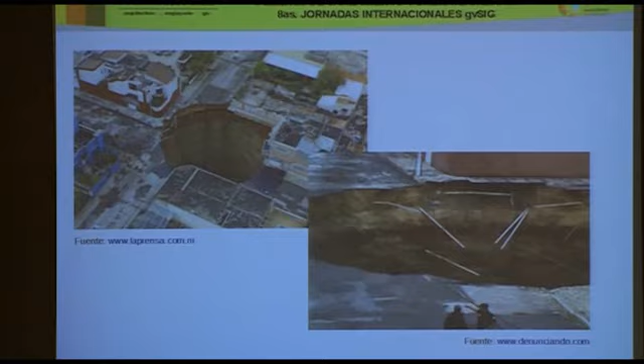Do we need to manage the urban sewage system? Obviously, the answer can be found in these two pictures. If we are not managing what's underneath, what's underground... those pictures represent a tropical rain in Guatemala, and this big hole has been created because of a lack of management of the network, and also because of another characteristic, a karstic land that was not well managed. This is why we need information, we need documents, we need to update that information for this sewage system network.

So the first part will be dedicated to the introduction. First, we are going to see what are the objectives and what is the methodology that we are going to use. Then we are going to see a theoretical data model that we could use to design our network. And we will also establish some information import tools, and we will also talk about gvSIG functions to complete the model.

Then with the tools that we find in the gvSIG environment, with extensions or with some applications, we will see a bit of the extension of those applications to manage this urban sewage system. And at the end of the first part, we will introduce the second part for those that will stay with us this afternoon, or for those that are not coming.

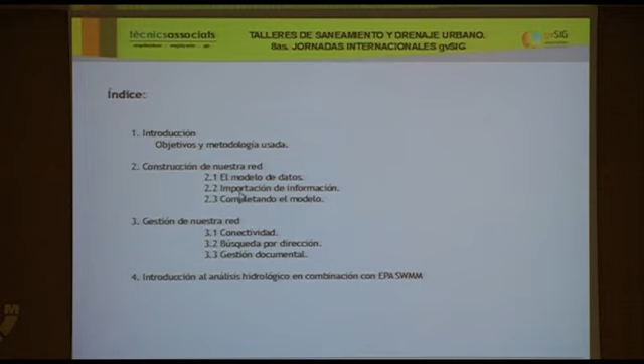The objective of this workshop is to give you the capacity to visualize the potential of gvSIG for the management of the urban sewage system, and also to manage any urban infrastructure network, not only the sewage system. What we do for the sewage system we will also do for the supply network and any other urban system with the Arc-node model. We will be able to use it for other systems.

So we will be using a scalable model. We will be able to design our network, manage it, and have a broad view of what could be an integrated management system.

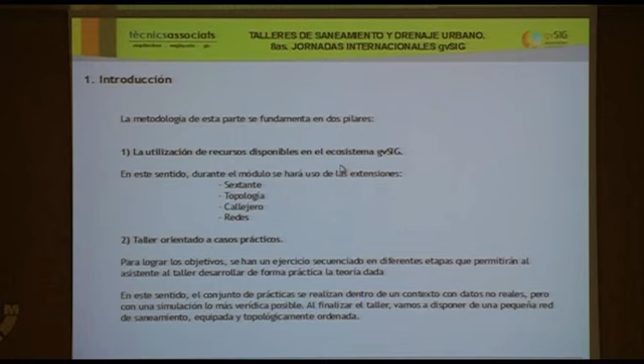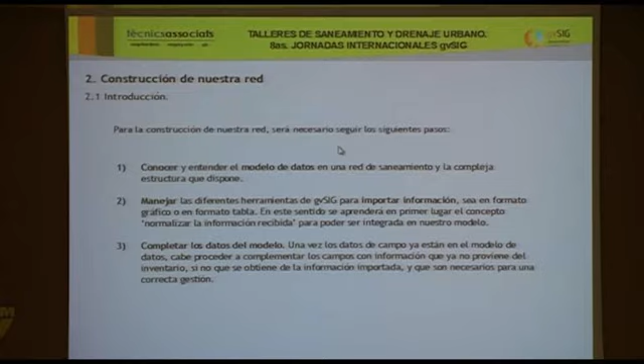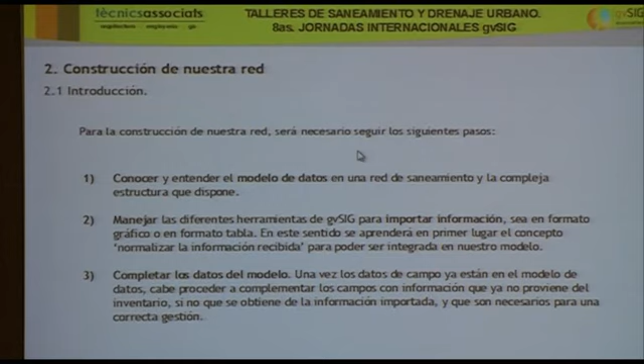To design our network, the first thing we should do is to understand the data model, to use different tools to import the information, and finally to complete the data model. So what is this structure?

The advantage of working in a free software environment is that we can use other extensions, other open source software, and combine them.

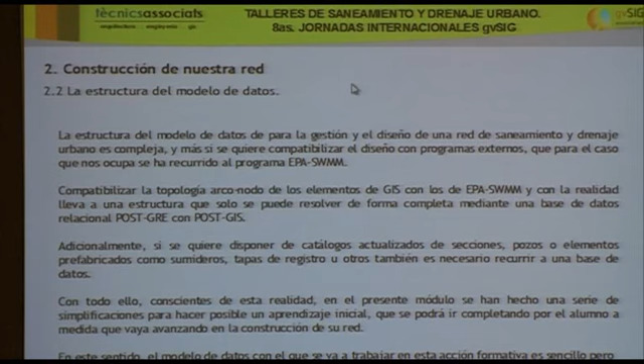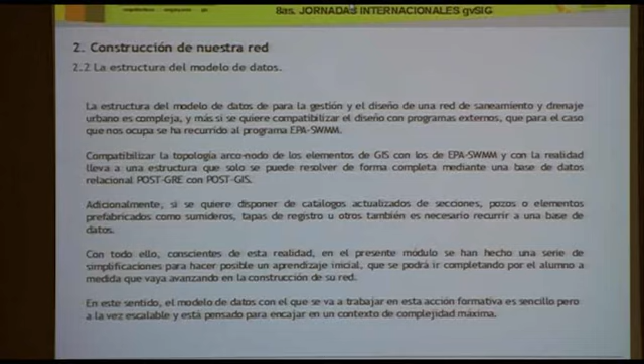So for the analysis of urban sewage systems and also supply systems, we can find software designed some years ago by the pollution agency from the United States. It's an open source software, from 1971 in its first version, without a Windows environment. So since 1971 the Americans have been analyzing the urban sewage system with it, and also the supply system. That software is called EPA-SWMM.

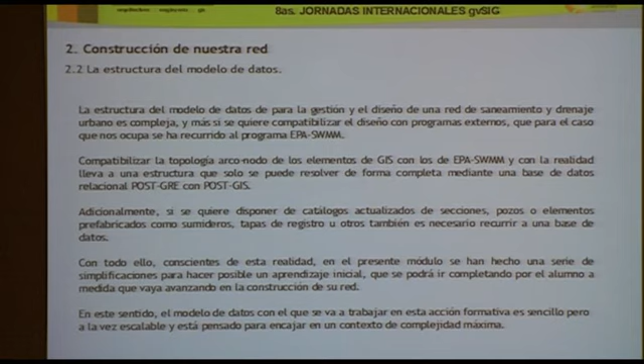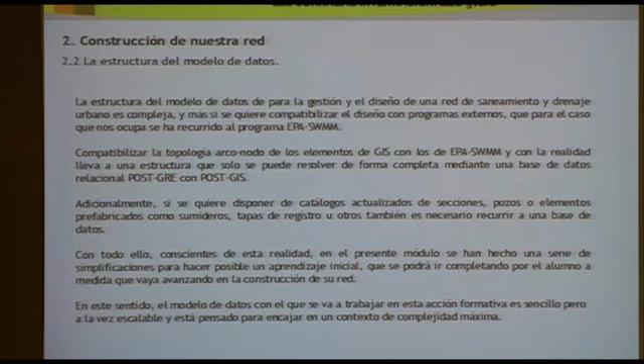So if we are going to communicate that information with this other software, the data model should be designed to have good communication of data. This data model should also solve the conflict we might face when we want to combine the Arc-node topology with the information requested by SWMM. So here we are going to try to solve that conflict, obviously.

So if we are using a relational data model, we will simplify the methodology and gain higher potential to collect more information. It's very important when collecting data, and it really helps us a lot when we want to collect that information.

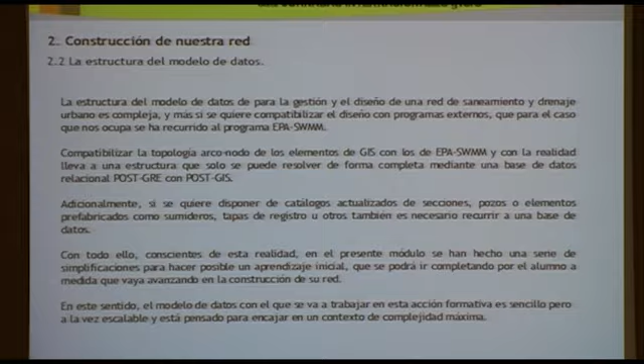In databases, we can already have some pipe catalogs, register posts, and the different drainage pipes, so we can have reports, and it's very versatile. Thanks to this new system, we will be able to work much better and have a general idea of how it is operating.

So on this slide you see how the topological model of Arc-node is working, thanks to which we will be able to manage all the elements of our network. All the elements will be either Arc or node, so we will have to combine those elements of the network.

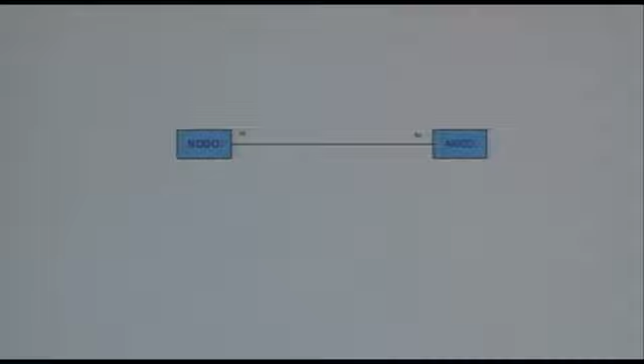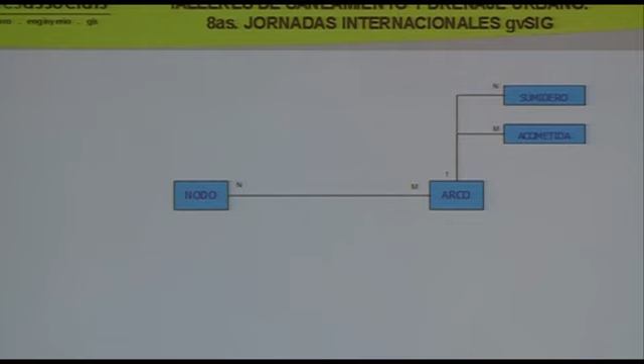Well, obviously we can decide if we want to do it or not, because if we can define Arc and node connection, it's more than enough, obviously. So it's work that's already done, and that will be very useful.

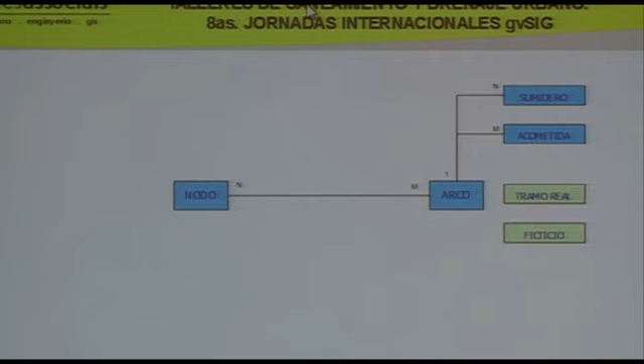For Arc, we are going to define two different Arc typologies: real or fictitious Arc. For real Arc, we mean any network element that really exists, a physical element, the pipes of our network. By fictitious element, we mean elements that do not exist in reality, but that we are going to use for our hydrologic calculation, which EPA-SWMM will be using. It is sending virtual information from one node to another, a virtual Arc, so it's not existing, and the information given is also virtual. So we have real and fictitious Arc elements.

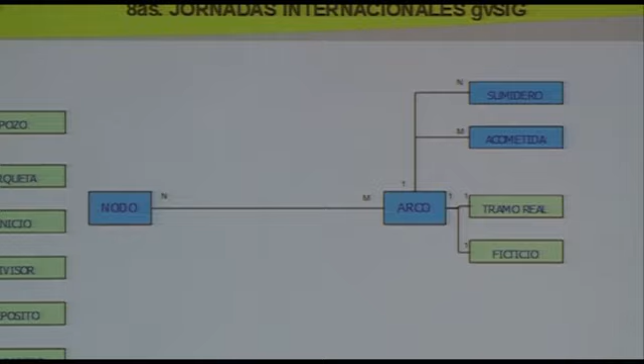And the relationship between the two is one-to-one, a cardinal relationship. For the node, we have different kinds of elements like wells, sewers, a spillway, etc. All these are elements that we can find on the spot, all the nodes that we are going to find. And we also have a one-to-one cardinal relationship.

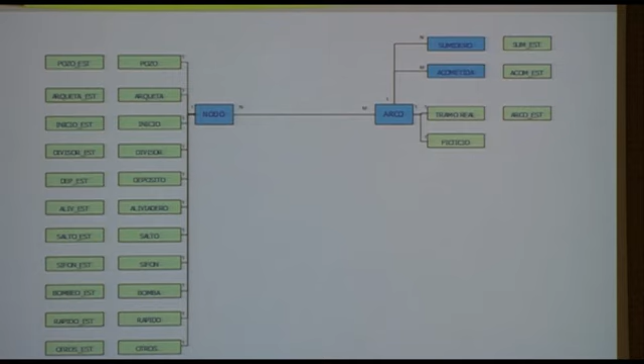Obviously, all these elements will be linked to a state-associated table, in which we will be able to include information about a given time status. We'll see its pure geometry, its situation, and all that information will be stored in the nodes, but also some information changing with time. In a sewage system, we have two types of information: the state, the situation, the state of the art of all these elements, and also the follow-up of those elements. Elements changing with time will be stored in a different table, and the cardinal relationship will be 1 to m, and we might have some end files of real information on those elements.

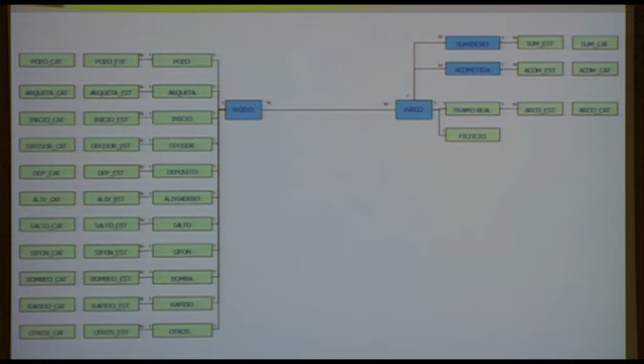Furthermore, we might also design some catalogs with the system's elements in order to simplify the management and to have access to all the information available. For example, a well catalog, a spillway catalog, and each. We can define and design our network according to our needs, and design the catalog that we might also need for the management of that system. The relationship of the catalog table with the reference table is 1 to n, so n elements of our table can be linked to one element in the catalog table.

To finish with that data model, there is also a group of tables that we can see here in yellow. These are the tables that can manage the information given by the system itself. So we have the event table, and we can assign different events to the different geometrical elements of our network.

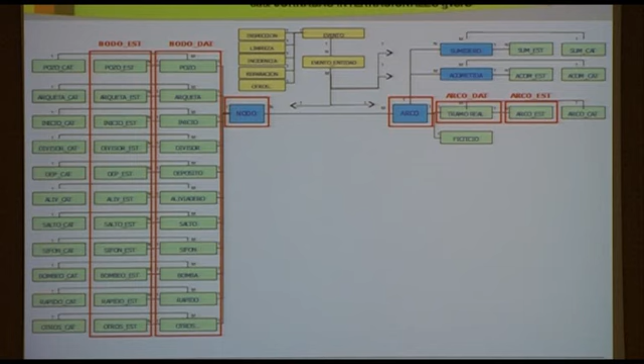So what you have seen before can be summarized in 2 shapefiles and 4 more tables, and apart from those 4 tables, 2 are status tables. We will be able to feed this table with information, with data, and to update that information about the follow-up and the situation of the network. Apart from that, optionally, we will be able to manage the other tables associated to the 2 main shapefiles, but this is something that's optional - you don't need to do it. We have those 2 layers with information and the 2 linked tables. It's more than enough. If you want to add more, it's up to you.

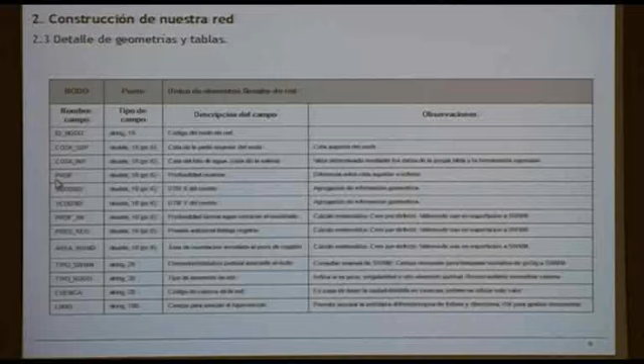So this chapter is a bit more theoretical, as I told you, a bit more intense. Now we are going to explain the different fields that we need to have in our data model, so that we will be able to analyze the fields in the node and arc shape, and that should also contain the other 4 linked tables. It will be available at the end of the workshop, at the end of the conference.

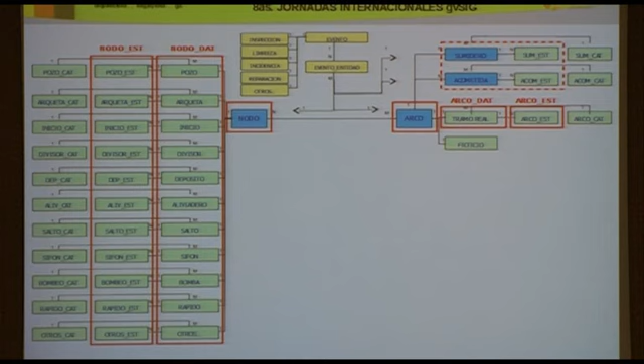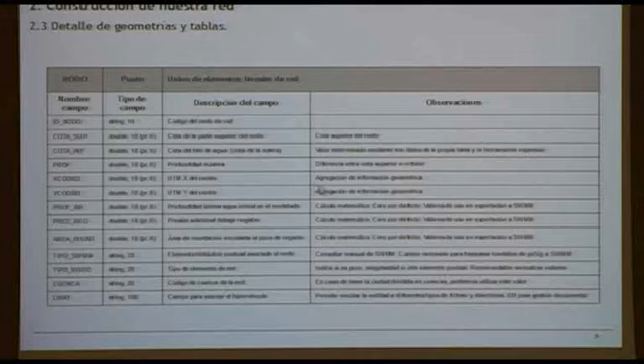So for our node shapefile, it is very interesting to have an identifier. It is a single identifier about the upper elevation.

The difference in the different coordinates, x and y, and also the information that will be requested from the element table.

EPA SWMM will also have some information about registry and about the drains and the spillways, and this information will also give us some information about the quantity of water that is stored in the different nodes.

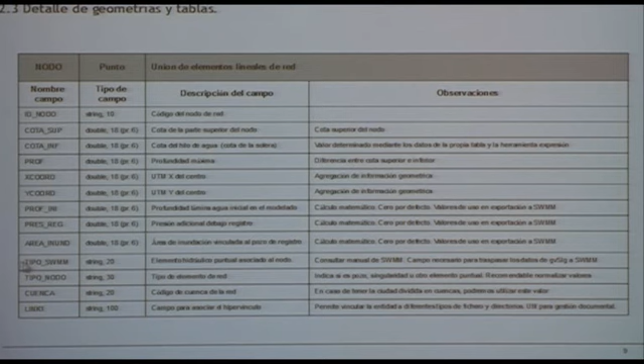Finally, we have this node layer that will need two other fields. The first field explains which type of node we are using for the mathematical calculation, and the second field is the type of node in reality, the associated catchment, and another field that we will use to have hyperlinks and also good document management.

We have also two types, the node and SWMM. We have those two fields because a node in our network, in our GIS network, could be different from what we find in reality.

I'm not going to get into details, but we will see that in the afternoon. A node in our reality...

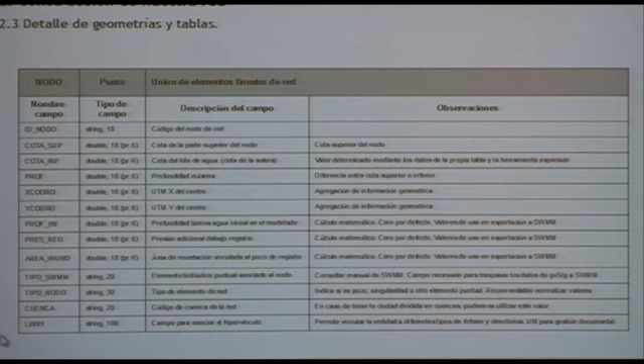Might be, for example, a spillway, but mathematically speaking, that spillway should be an arc. We will see that in the afternoon. I want you to understand the concept that a node in reality could be one thing, and in the mathematical model it might be something else. This is why we need that information: what is that node in reality, and what is its mathematical behavior? You will see with arcs it's happening exactly the same, but we'll talk about that later on in the afternoon.

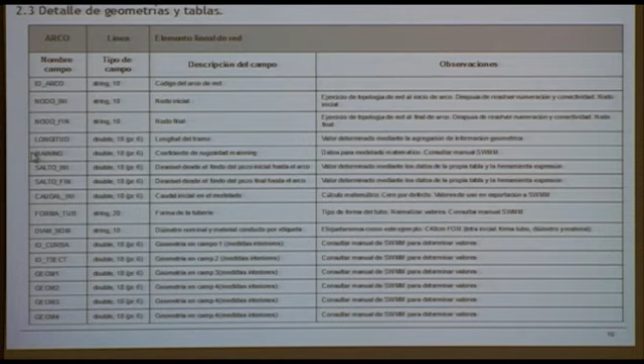We will be able to get some information about the starting and ending nodes of elements of our arc. We'll have some geometrical information. We will also include a field about the information that the mathematical model is using to calculate the speed of the water inside the network.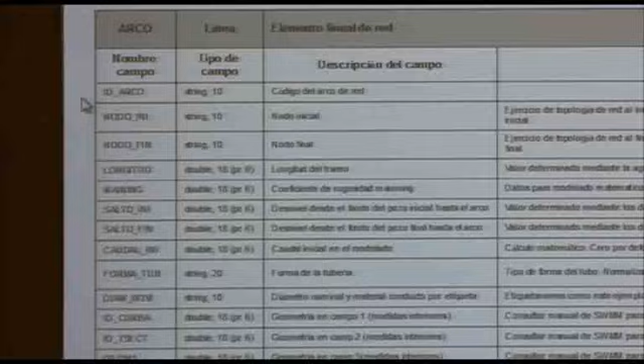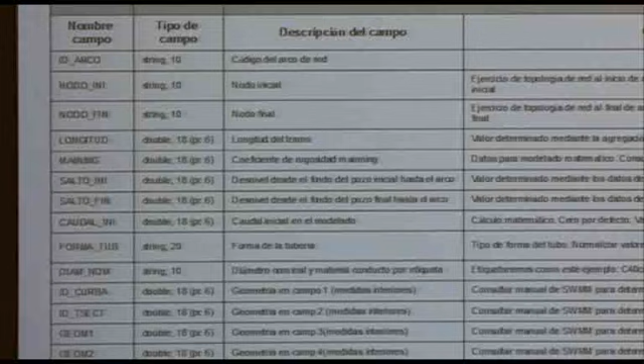So we are also using that parameter. It depends on the material that we are using in our pipes. We will also put some information on two values that EPA SWMM needs to calculate, and also the difference between the bottom of the well and the distance between the different pipes in our system.

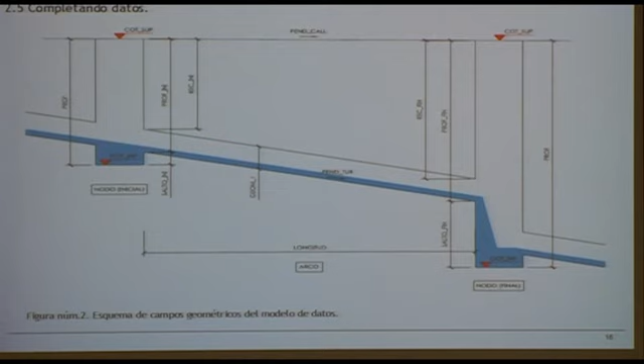We'll be able to see here the first and second element. Here we have the distance that we might have between the elevation, the lower elevation and the upper elevation. And at the end, when our pipe arrives to the next well, if there is a little step, a little jump, we can also calculate this distance.

The initial depth is the distance between the initial well, the depth you see here on the slide, and we will also have the final depth. Then we have two other concepts: the distance between the first part, the upper part of the pipe, and the second part, the lower part of the pipe.

We need that information to manage our system, because some pathologies, some problems that we identify are due to a bad coating of the pipe or a wrong traffic of the water through the pipes because of those differences in the elevation of the different wells.

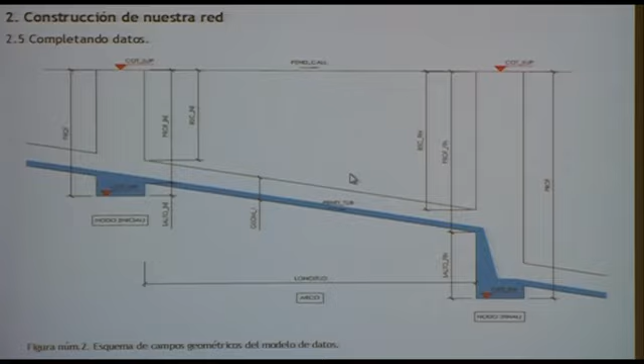Now I go back to the previous slides, and apart from the initial and end jumps, we can also collect other values to start with the mathematical calculation. We have another field, the shape of the pipe, and for the shape of the pipe, we need to combine it with the mathematical calculation model.

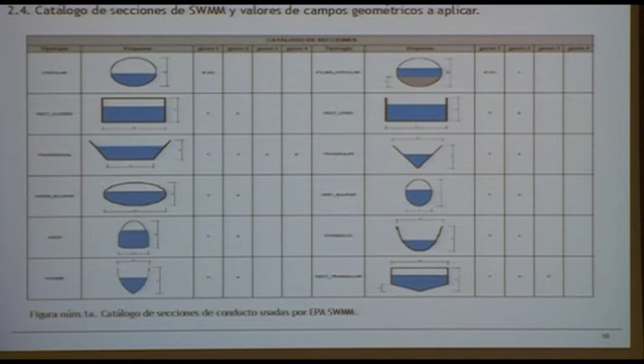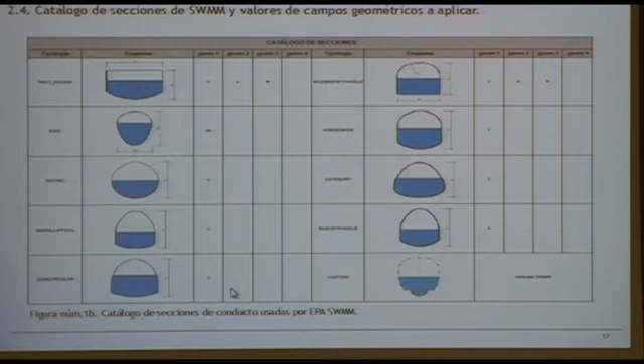Well, the software is an American software. It has been made with the sections that are used in the American system. And in Spain, we have translated those sections into Spanish. It has been made by the Polytechnic University, Professor Martinez Soriano. They have translated the software, the guide, and it has been done very well. So thank you very much to Professor Martinez, and that can be used also in Latin America.

But the names of the sections are still in English. So, for example, the first one is called Rect Round. The second one is called Egg. So we keep the names in English because the sections are English, are American, and we don't find them in Spain. So there's no equivalent. So this is why we are still using the words in English.

In the data model, the shape of the pipe is the name in English, defining that name. If we want to put custom, then we will define in a table the geometries of that custom section pipe. We will also add a nominal diameter field to collect the information on that pipe, and we will be able to tag on the map using that field. So we will, for example, say it's made of concrete, a diameter of 40, rectangular, plastic, to be able to tag. So it's a tagging field for this model.

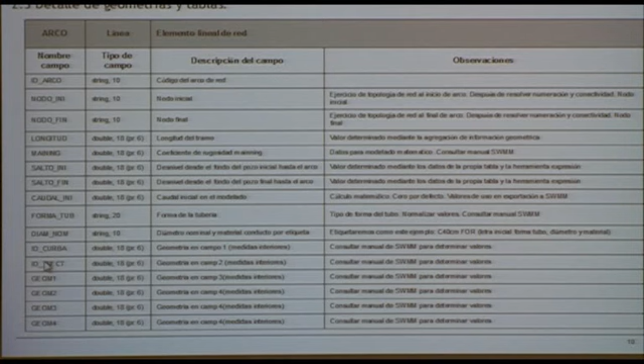If it is a custom section, we will identify the curve that is being assigned to that model. If it's a non-regular section, with this mathematical model, we'll be able to model, to design, non-regular sections. So for a custom section, we will identify the shape of that section in the table.

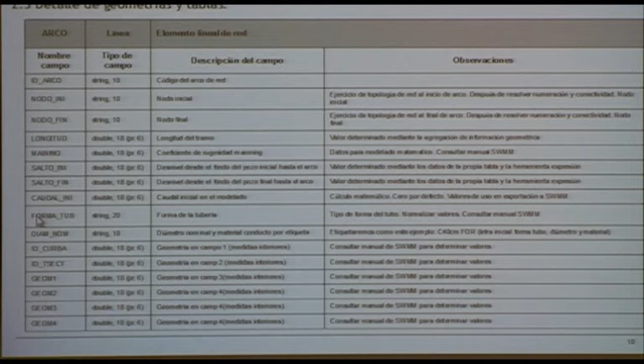And as far as geometries are concerned, the calculation model includes four different geometries for our pipe shapes, and we will need to read the guide to know if we have to include the 4 types or less. So, for example, the circular geometry has only 1 type. Rectangular geometries have 2 geometries, geometry 1, the height and the width. We have more specific sections that will have additional geometries.

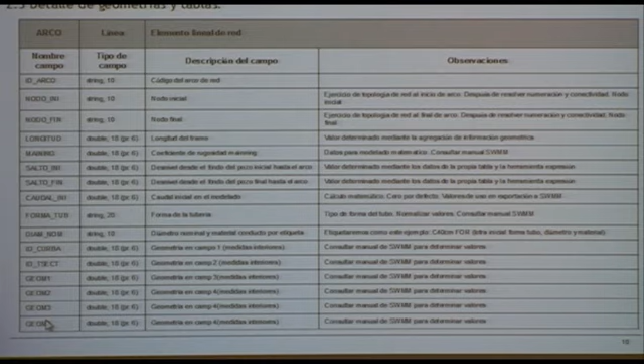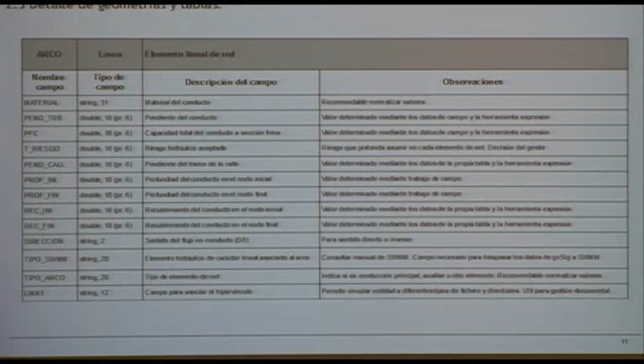So for the different arc model, it might be interesting to get some information on the material, of the slope of the pipe. Well, it's not a field that we do need because the mathematical model is calculating it automatically. But for the management, it might be interesting to know the slope of that pipe to predict the different elevations, if the slope is too weak or too steep, and we will get that information through a GIS process. We will be able to calculate the elevation of the nodes and combine it with the depth of our pipes, for example.

Another field, the profile pipe conduct, to know a bit what is the depth of our pipe. It is not a field that the model needs. The EPA SWMM does not need it to be operational, but it might help us to know a bit what is the flow of water through those pipes. It might also be interesting to get some information on the return period that is associated to the pipe.

In a network, that concept might be interesting according to the risk that we are ready to assume for the management. So it's not the same if we are dealing with a pipe in a very sensitive area near a school or near a high capacity area, where the risk associated is minimum and we cannot assume higher risk, or a pipe that is located in a steep slope with very few risks, and there we could allow that pipe to have a return period of 5 years, for example. So we can define a return period according to the management of risk that we are ready to assume.

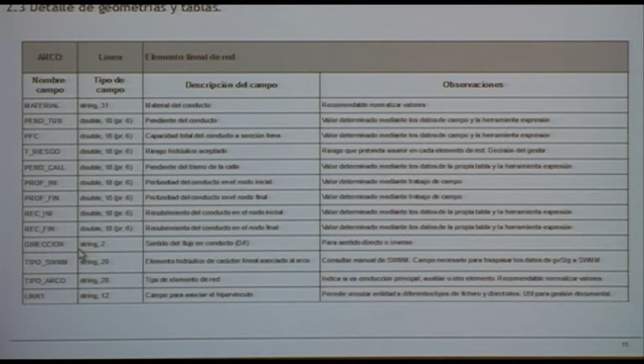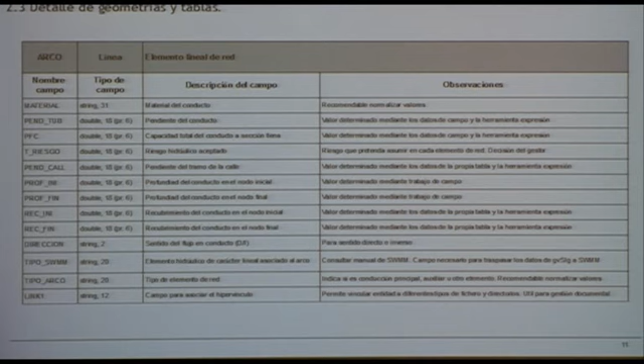And we will need to define it to make sure that the mathematical model knows exactly what we are talking about. Well, in the afternoon, it will be further explained. And to end up with this, we also have a link field where we will use a text string and link to a directory. Well, these are the fields that we need for nodes and arcs. And now we are going to see what is the information that we can have in node and arc, and in the different steps.

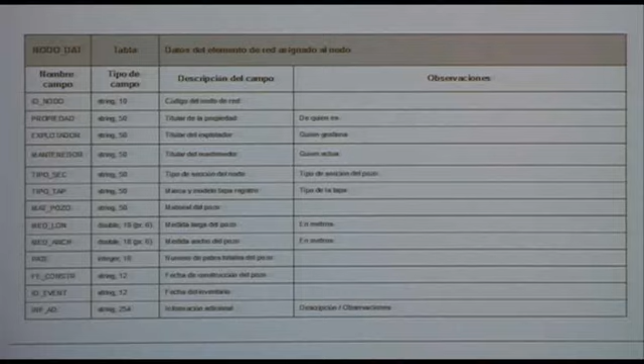For the node data, these data are linked to the type of nodes that we are using, to know exactly who owns that system. In big cities, the city is divided in different sectors, and some pipes might belong to one company and others to another one. So which type of section do we find? The kind of drain that is being used, the stretches that are being used, and all this kind of physical information that might be interesting.

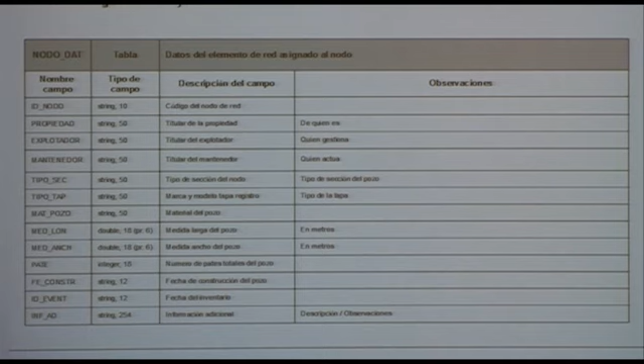Here we have another model that gives us approximate information. That data is not used for the mathematical model, so we can include the information that we want. It's just a reference that we can use, and the same happens for the arc information: the owners, the maintenance company, if we can visit it or not, and information about the land where the arc is located.

If we can identify that some problems, some pathologies, are associated to the land, if the land is made of this or that material, thanks to that we could also do some analysis of the pathologies and bring some solution. Type of network, if it allows some cleaning, in which basin it has been assigned. You know that cities are divided into hydrographic basins, and more hydrographic information that we might need.

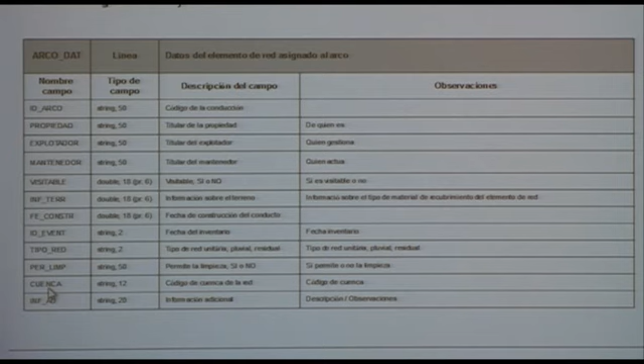As for status data, we'll dash through this, because what's interesting here is to get information on sediment, the type, the level, information on preservation status, the lower part, the walls, the top part. Also information on the status of the lid. This sometimes is a problem. Some of the lids break, some protrude, some are sunk.

If these lids break, you don't need to list this. You simply have to replace it. But this information is always important. You need to check all of this. And as for arcs, we're basically interested in information on sediments, the structural status, and some additional information that you decide is important. You have 254 characters to enter in this string.

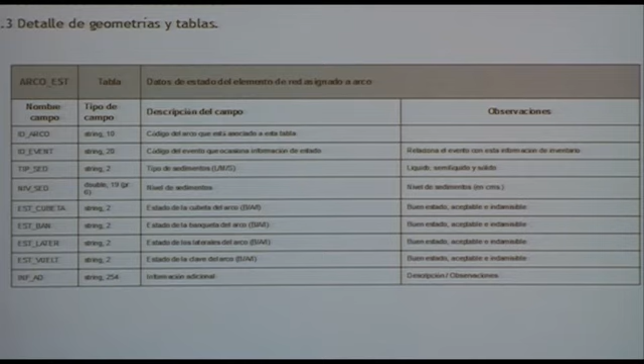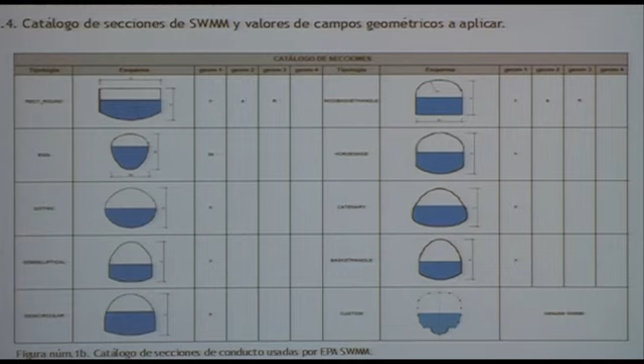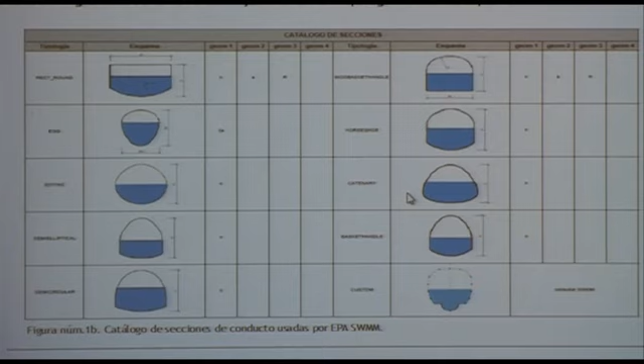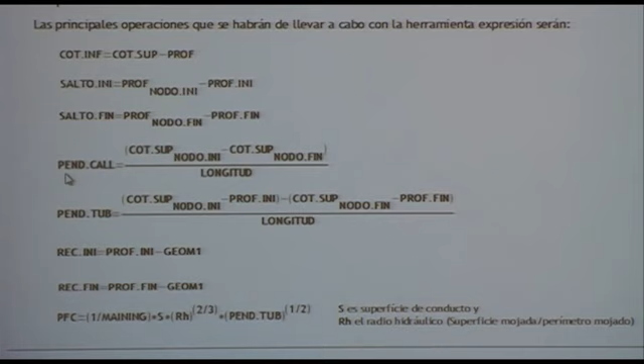Very well then, this has been the boring part with all the different concepts of sewers. We've talked about the database and then DBFs and shapefiles. Here you see the different profiles and sections. We can skip through. It's curious that in the US you have many oval-shaped profiles, but here in Spain we tend to use reverse egg shapes, like an egg upside down. Here you see the outline with the information we mentioned earlier, and here the different formulae based on which we will have all the information.

Here you see the minimum elevation, the lowest part of our node, the difference between the maximum elevation and depth. And we have this more complex formula which requires some knowledge in GIS, which would be the pipe slope. We need to know what the initial node top elevation is. We need to enter the maximum elevation of the destination node, the end node, and we have to subtract the different minimum elevations or drops in elevation.

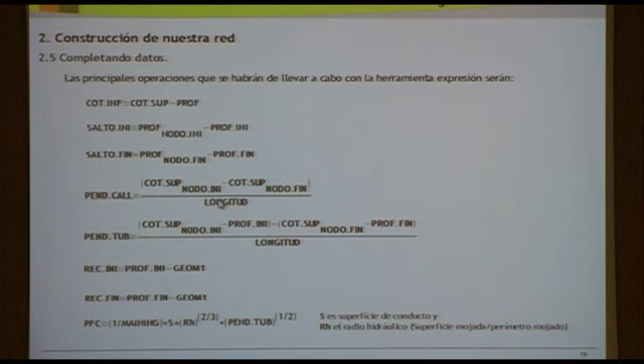We won't go as far as describing all of this in detail, but you have the formulae here so that, since you master gvSIG, you can use these tables to operate. So you can go online and gain more insight.

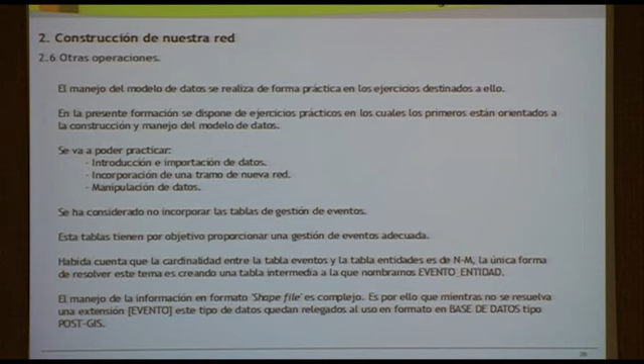As for Shapefile, things can be simple, but this is especially important or useful with relational databases because there are so many operations that can be done.

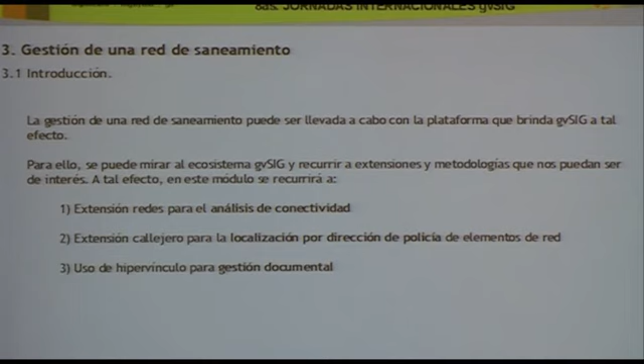Very well then, so this theory is sort of a snapshot of what you can do once you have built your network, as we have just seen. And it's a way to manage all the different variables. We have different extensions or gvSIG elements that are available for connectivity assessment. We have this link. I think you have this already. You have these two screens, these two windows. Don't worry, we'll see this later on.

We need to look at the flow field, and we can use this extension to learn how much network we have in the headwaters or downstream, and this will allow for easier maintenance and operation activities. It will allow for producing reports and so on. It's one of the benefits of using open software, i.e. you can make the most of what others have done, and even for a different purpose.

Fran Peñarrubia, when he produced this, had roads in mind. He studied stop management, route and path networks, but since this is based on an arc-node topology, the extension can be replicated and used for a different purpose. It could be a tree network or a mesh network, and in this case for sewers, the sewage system. So we are taking advantage of what other people have done who wish to share all of this.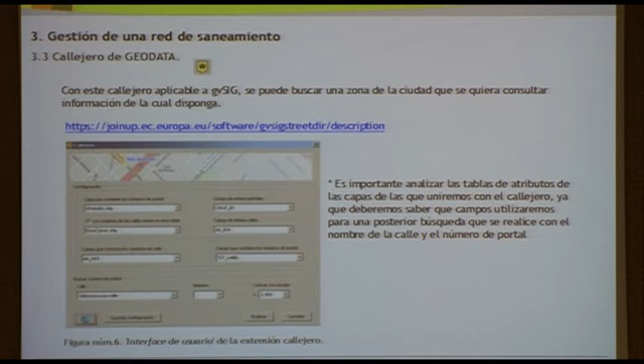The same goes for the street plan. This is an extension which was produced by a company in Barcelona called Geodata, and it was designed for a different purpose. The idea was to design a plan to have a clear address and be able to use it as sort of a Google Street Map. So this extension that has nothing to do with the sewage system, and I believe my colleague will give you some more insight into this tomorrow, has been used for a different purpose. So it's absolutely great, and it can be extremely helpful to meet certain typical needs. I'm pretty sure tomorrow we'll cover this in greater detail.

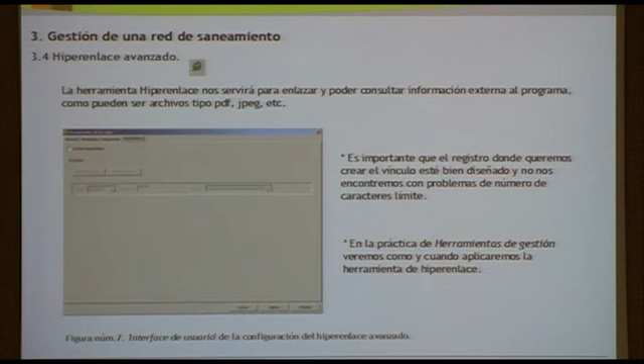Then we have advanced hyperlinks, which is super simple but very, very useful. You link each feature with a directory and have digitized absolutely everything. You can have videos, incidents, everything digitized in one directory. So, having one directory per feature, gvSIG becomes de facto a very powerful element to manage things. So, the days of visiting town halls and getting a pile of folders from a civil servant are over. And this, again, is super, super useful. I believe tomorrow you will get more details about this, but I just wanted to point this out very briefly.

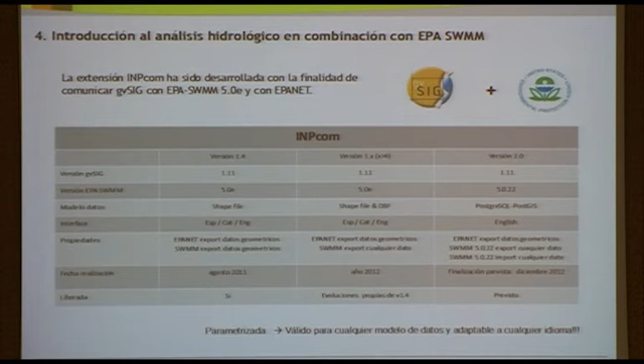In closing, and I think we're sticking to the schedule. I think it's 12:30. Yes, we'll finish this section here, and then we'll break for lunch. I just wanted to briefly tell you a little bit about the evening workshop. For those of you who are still interested, let me tell you a little bit more.

One of the advantages of working with gvSIG is to be able to communicate with calculation systems for, say, supply networks, water supply, and sewage systems. This software was developed by the United States Environmental Protection Agency. It has great prestige regarding urban hydrology. You have EPA SWMM, and it has prestige because the software they've developed is very stable. But one of the drawbacks is that it doesn't have a GIS environment.

So you have to use tools, which makes this software, say, too small for large networks. So now we can make the most of this software in very large networks. When you have GIS information, you can massively export it to the calculation software and then go back to gvSIG to assess the results. And then gvSIG also becomes a very powerful analysis tool because EPA SWMM is very powerful in certain aspects. So both things can work together very well.

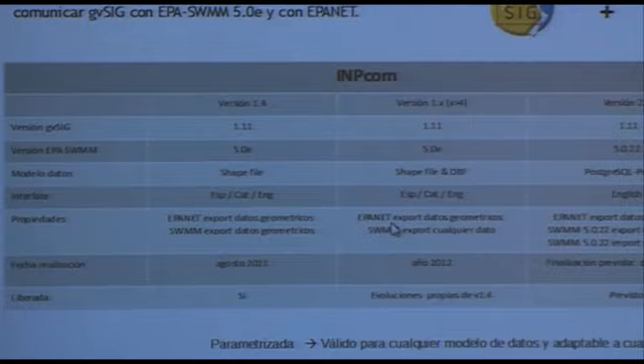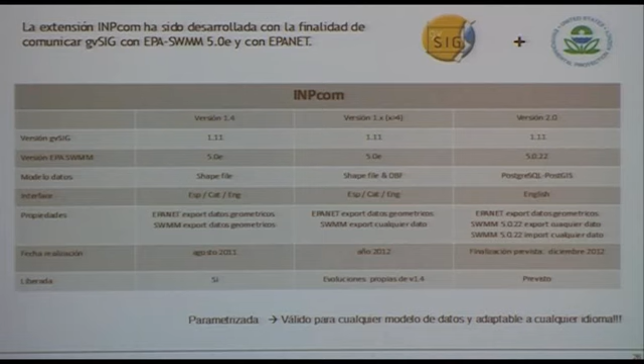Version 1.4 was launched a year ago, and we have been improving this. I think you have 1.72 now. We're already on version 2.0. This all works with Shapefile. It is more useful now. The first version only exported geometric data. The version you already have allows for exporting SWMM settings. Hence, we can control all the calculation settings. So we're just asking the US software to run and show results, and then we have version 2.0. It's still a beta version.

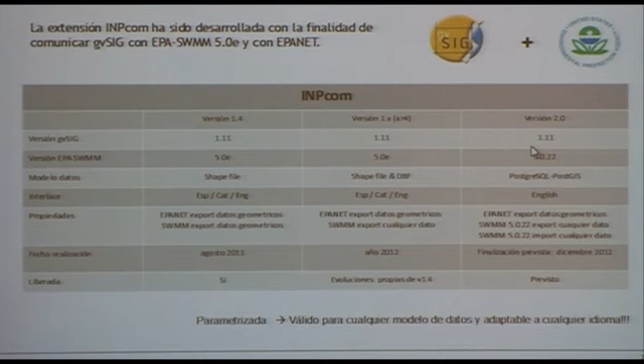It's much more complex and allows for input and output with configurable databases. I think you have version 1.72, as I said. So any data in gvSIG can be used with EPA SWMM, and we're still using the geometric data for links, nodes, and so on of version 1.4.

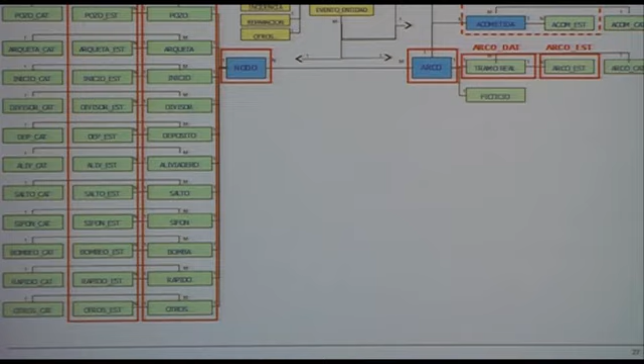So this is where development stands, and this evening you will be able to see this in a more practical workshop. Going back to the slideshow I was showing earlier, you have all this calculation, and again, one node can be a well, a connection, but it can behave differently from a mathematical standpoint. I forgot to say that as for the mathematical model, we have two layers. One would be drainage layers, and we can make the most of gvSIG's potential to see the runoff behavior in our urban basins through very specific methodologies we will be going into this afternoon, so we can see the rainfall and the amount of runoff and the amount of water that enters our network.

And then we have the vertex layers, which is very interesting. So we see that there are some elements that are entered here, but apart from these layers, we have these tables here whereby one node can be, in reality, all of these elements here, say well, connection, and so on, but mathematically it may behave differently. It could be a junction, a divider, a storage. I won't go into all of these now, but these tables are necessary because a node can be one thing in reality and a different thing mathematically.

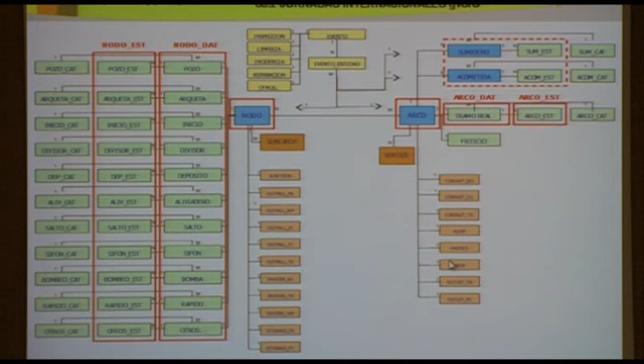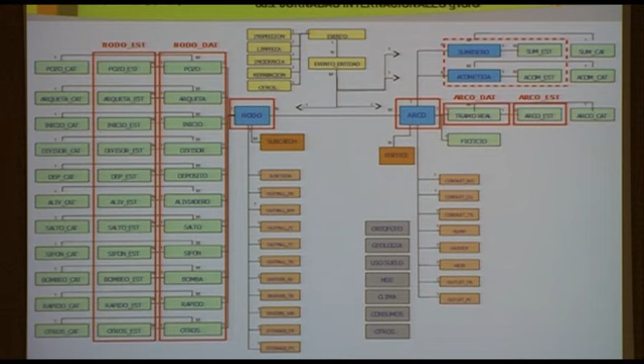And the same goes for an arc, which can be a stretch. And in the mathematical model, it could be different types of pipes, it can be pumps, it can be spillways, flow regulators, and so on. So we have this information, and gvSIG can give us information: ortho photographs, land use, digital elevation models, climate, drinking water supply. So many pieces of data in raster format, which will allow us to very accurately define our hydro model in our basin. In closing, in gvSIG we have project data, rainfall, climate, pollutants, should we wish to include this information, and so on.

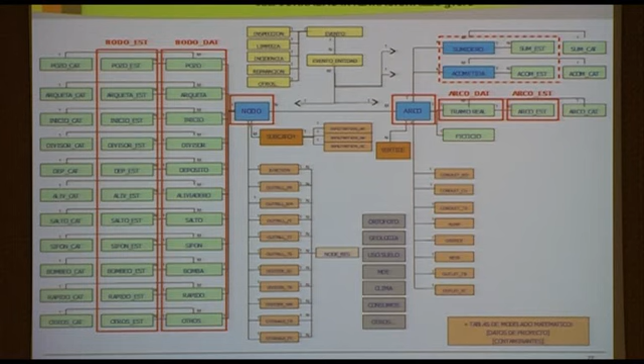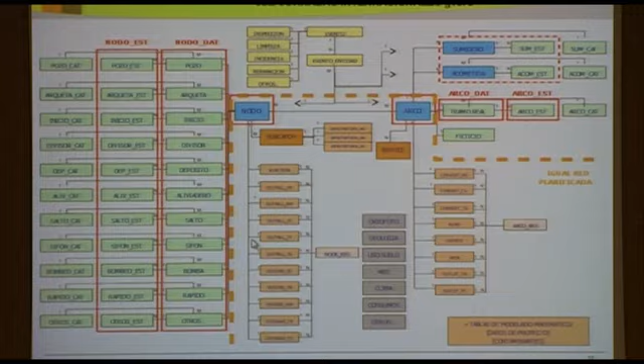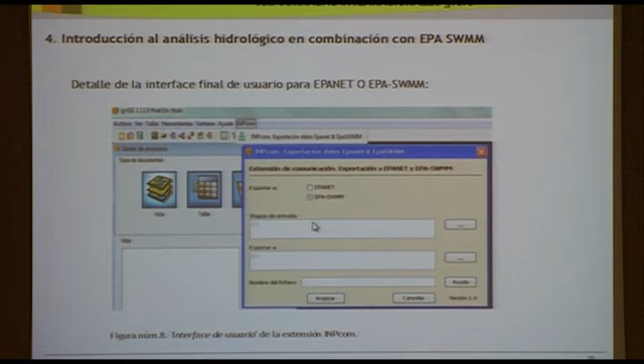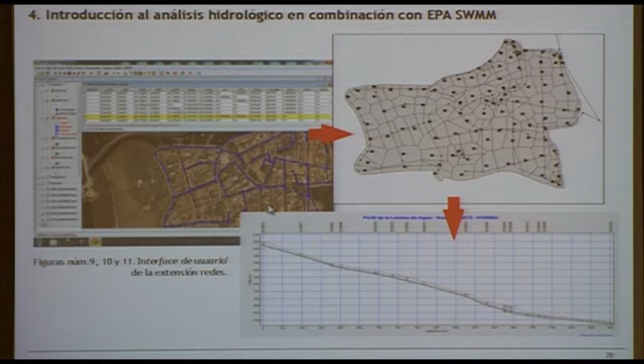Of course, these results can be linked to an outcome table, both for arcs and nodes, and all this information under the orange line can be duplicated in case we are interested in simultaneously having real-time information and for future master plans, so we can duplicate this and use the information for forecasts and to learn in real time what is happening. You'll see more this afternoon. When you have the tables, you export through the interface. You decide SWMM or EPANET, input, output. And the benefit of this software is that it allows you to draw profiles. You can learn the evolution of each of the elements in time. And that's it.